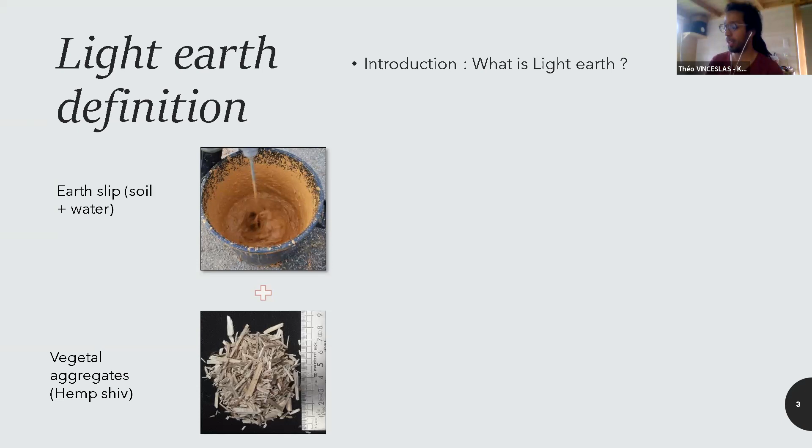What is light earth? How can we make the definition? So it's really simple. We can call it a low technology because it's just earth that is mixed with water to make an earth slip. And besides, we have vegetal aggregates. So here it's an example of hemp shiv, and then we mix it, and we have different kinds of implementation.

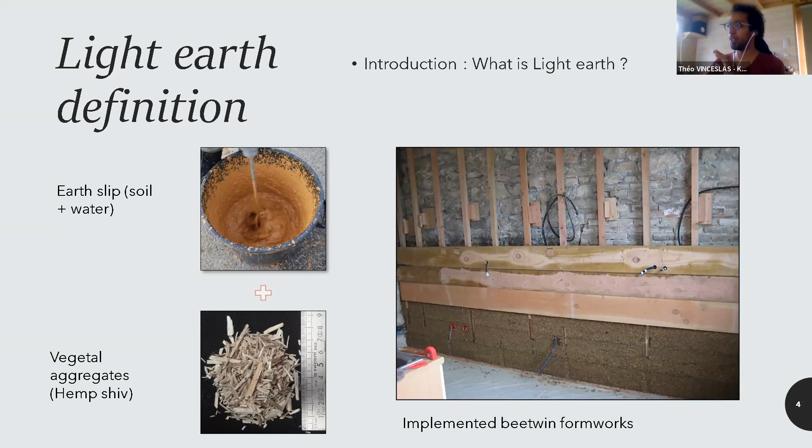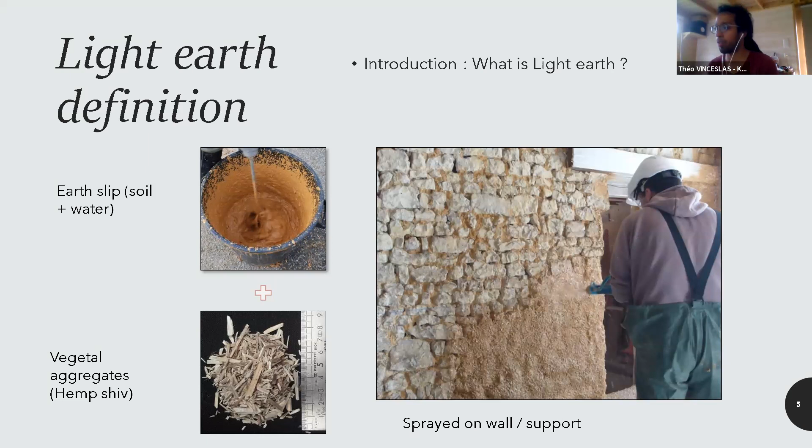So I'm beginning the presentation with simple examples, and then we're gonna go to more specific examples at the end. So firstly here we have an implementation between formworks. It's actually between an existing wall and a wooden formwork. So the mix is poured between the formworks. We can spray it also with a specific machine made for lime hemp or other kinds of sprayed materials. And we can also make some prefabrication, so make some bricks by molding or by spraying.

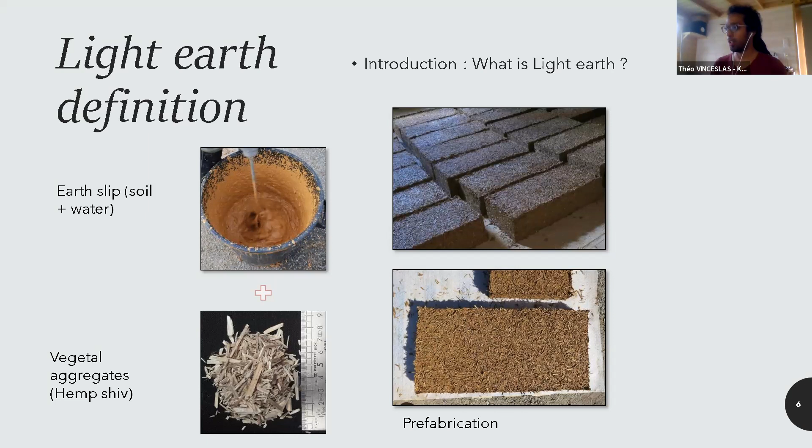So this is really the simple definition, and to go a little deeper, we can look at the densities. Why is it called light earth? Actually, it's because of the volumetric mass or the density that is quite low, to make it an insulating material. So here, what you see are different examples of raw earth with fibers or with vegetal aggregates and their corresponding densities.

So when we take raw earth or soil completely, it's between 1,600 and 1,800 kilograms per cubic meter. And when we add some fibers to it, like maybe you have some examples in Turkey of wattle and daub, we add just some wheat fibers to the earth and lighten it a little.

So it makes something like 1,200 kilograms per meter cube. And then you have the first kind of example of light earth, but applied with a trowel. So it's quite dense, actually. It's still quite heavy, around 900 kilograms per meter cube. And then we begin to really talk about light earth, so between 200 and 500 kilograms per meter cube. So maybe the precise definition of light earth is by its density also.

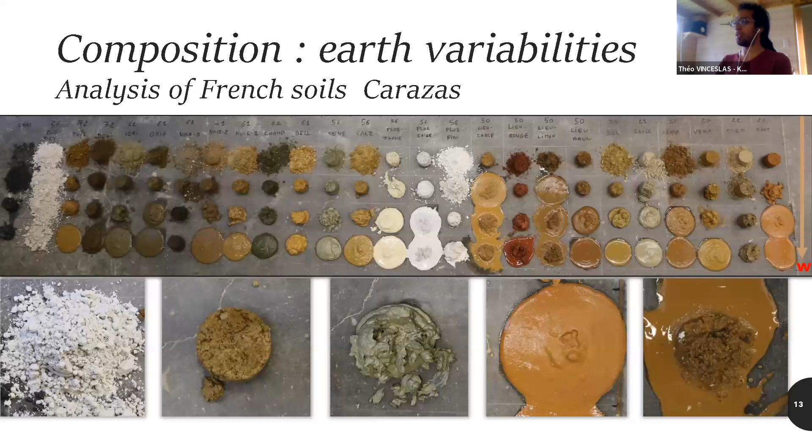So here, I don't know if you see the mouse, but we can say, for example, that this red earth, the earth that is really red, has a lot of clay, and the two that are near have really less clay content and less fine particles. But we cannot say that it's a scientific method. It's really something made to observe the behavior, to learn how to look at the earth, and also on building sites, when you need to choose between different kinds of earth.

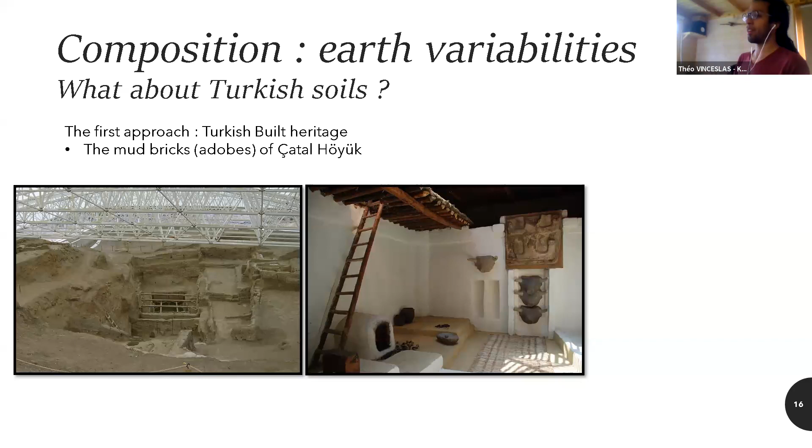So there are a lot of examples like this that show that everywhere you have a way to build with earth. And actually, we're gonna see it, but there's a really big variability of earth, and a big amount of this variability is usable for light earth. With light earth, we don't need a precise earth, and I'm gonna show it to you.

So I found a little scientific article that shows the variability of earth that you can find in Çatalhöyük, and you can see that there's already a big variability, and even with this variability, they have been able to build with mud bricks. So even in ancient times, even with a big variability, we have been able to build.

So now, how can you test if you can build with light earth? This is the first example of a test that you can do. You mix earth with water and try to do this test. It's the hand glove test. The objective is to have the hand in the middle. When you have the hand on the left, you have too much earth in your earth slip, and when you have the hand on the right, you have not enough earth inside your earth slip.

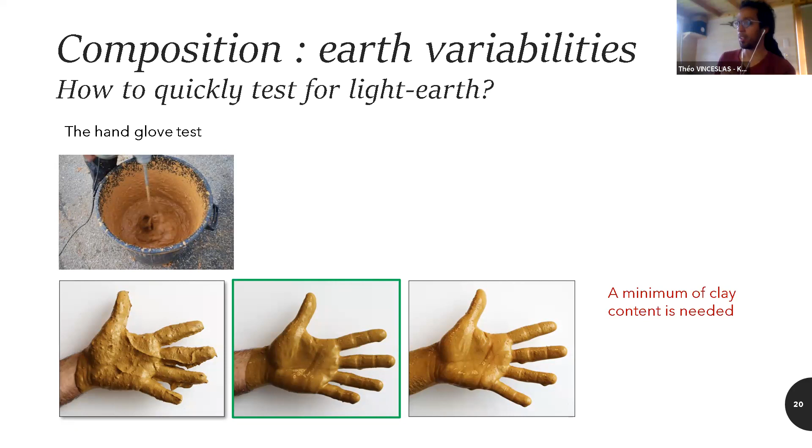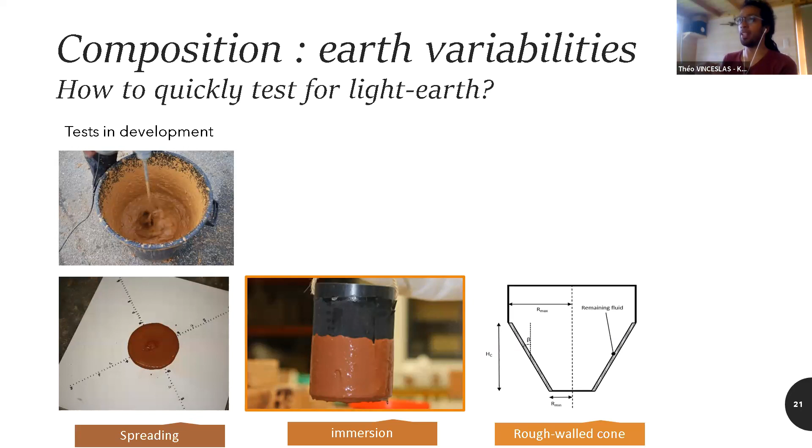So each of these tests is usable on site to characterize the earth slip. But the thing is that we don't have the right way to say that they are equally valuable. We still have to say for each earth what is the measure that has to be reached. So that's why I say they're still tests in development. Okay.

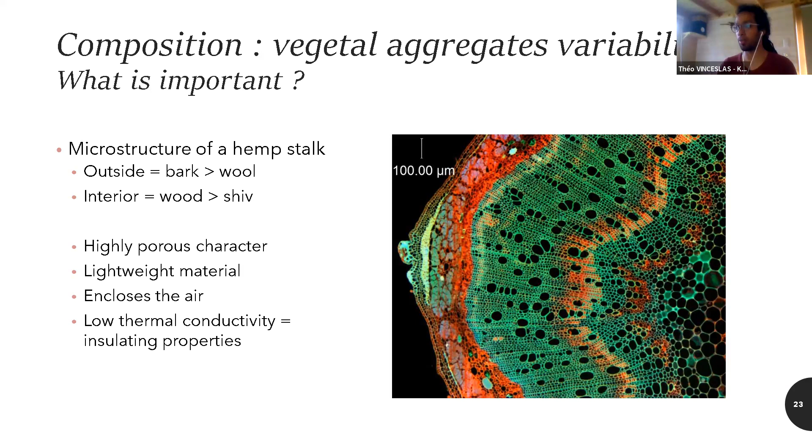And for this material, here is a representation of the microstructure of a hemp stalk. On the outside, in red, you see the wool, the bark, and on the inside the wood that makes the shiv. What we see is that this is highly porous, so it makes a lightweight material. It encloses the air, and what we know is that low thermal conductivity is directly linked with insulating properties, and so with low densities.

So this is to say that the heat conduction property is directly related to density. So this is actually the aim when we do light earth, to try to reach the lowest density possible. And why we use vegetal aggregates for this is because their structure allows us to optimize the density, and because of their structure, we can reach some very low densities of light earth.

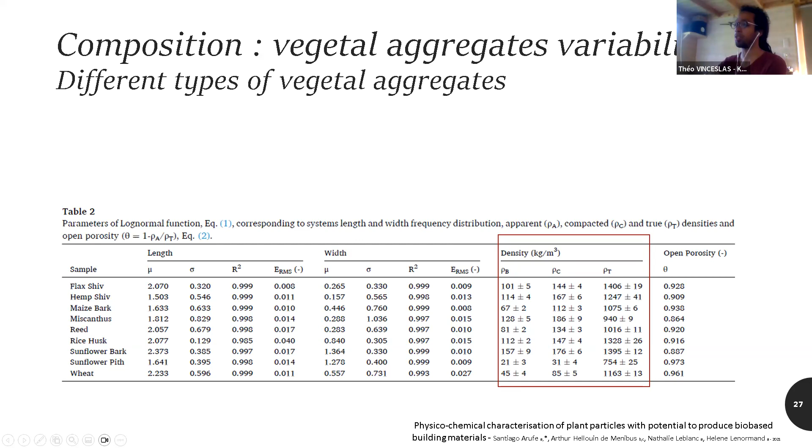We cannot use fibers like the wool of hemp, because it's too hard to mix. It could be mixed manually, but every time you try to mechanize it, it's too hard to mix earth slip and long fibers. So you have to use particles between a few centimeters and a few millimeters.

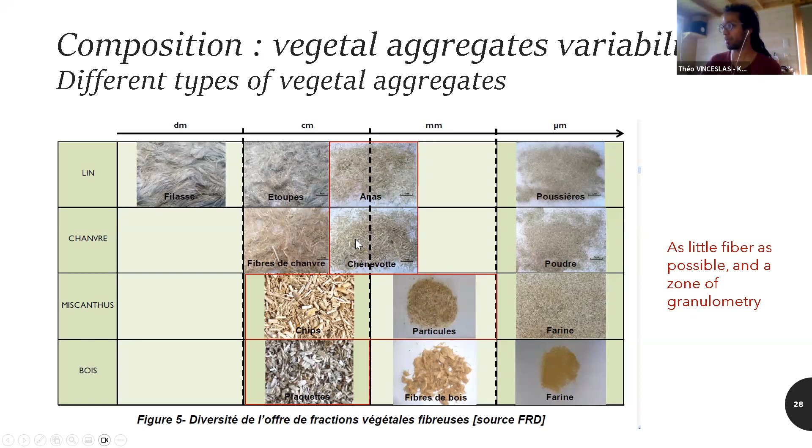After mixing, you sieve it with a 2 millimeter sieve to remove all the big particles and keep just the fine particles that are going to be used for bonding the vegetal particles. Then, once you have your earth slip, you correct the water content.

If you have too much earth, you check with the hand glove test or other tests, and you can add water. Or if you have too much water, you can make another slip and mix them together to find the good glove consistency again. Then you'll be able to mix the slip with hemp, also with a paddle mixer, for example — I'm going to show you at the end how it can be mixed in other ways.

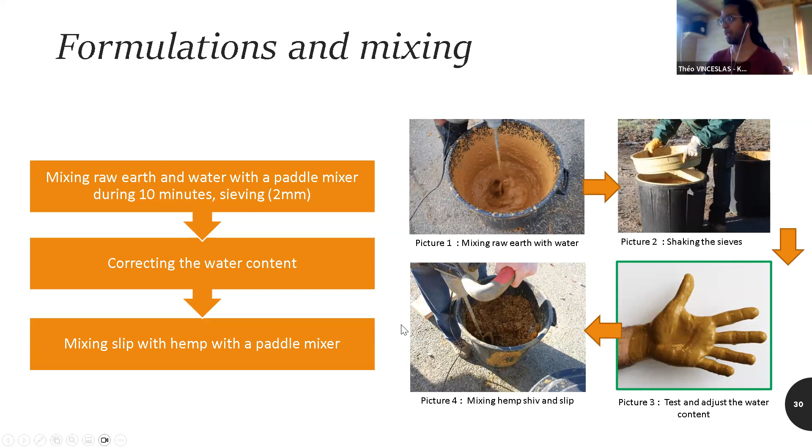As I said, this is a really simple test that is still used in France by craftsmen. The water content can influence the mechanical behavior, thermal conductivity, and density. We saw that the aim is to reach as low a density as possible, while keeping good mechanical behavior. The glove test has proven to be a real good experiment for craftsmen, and we still say it allows us to reach good performances in terms of mechanics and thermal conductivity.

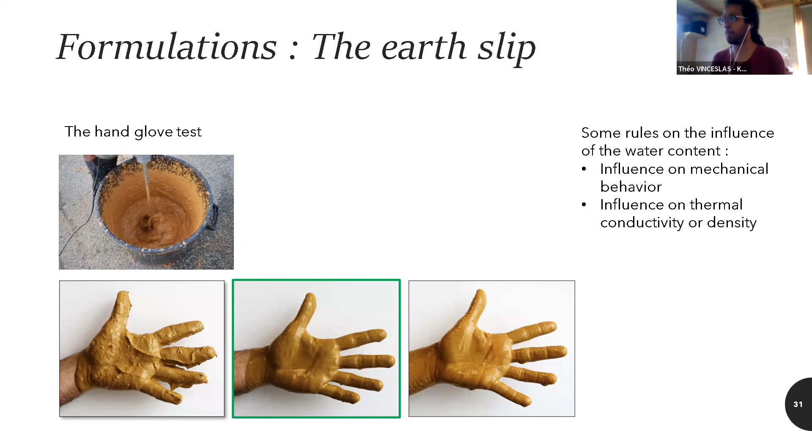This was to show you, in a graphic way, the examples, and after that we're going to see some figures on the performances. The aim is still to reach a really low density.

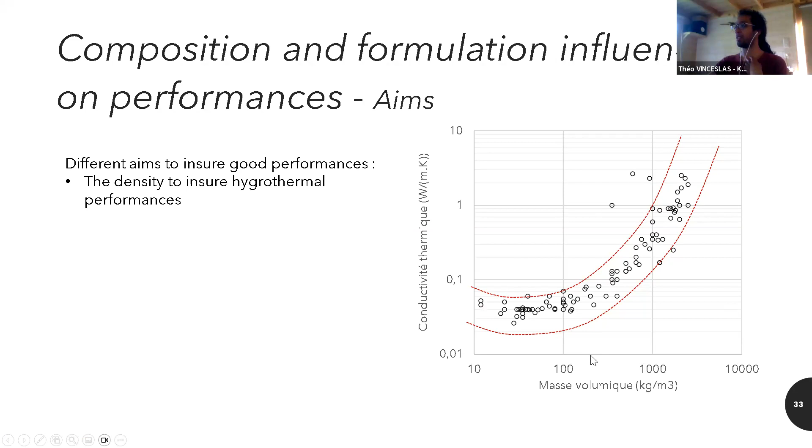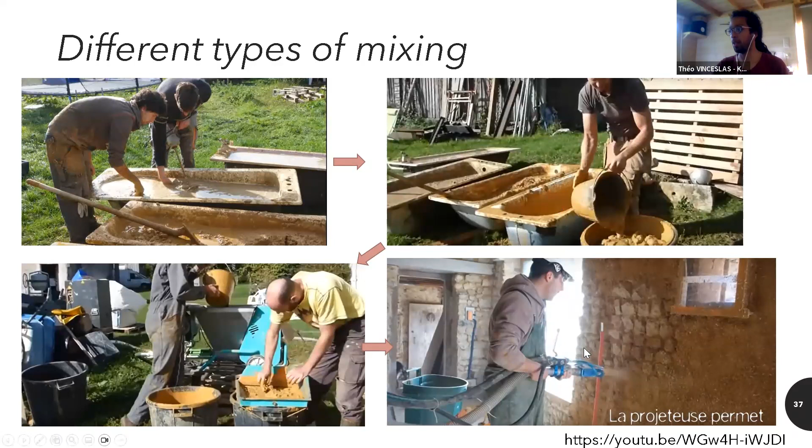The other way to do it is obviously to make it with a concrete mixer. So there is here an example of a concrete mixer. You can also make the light earth mix with it, or you can also make it with a planetary mixer - actually, it's also a quite good way to do it. The planetary mixer works really well.

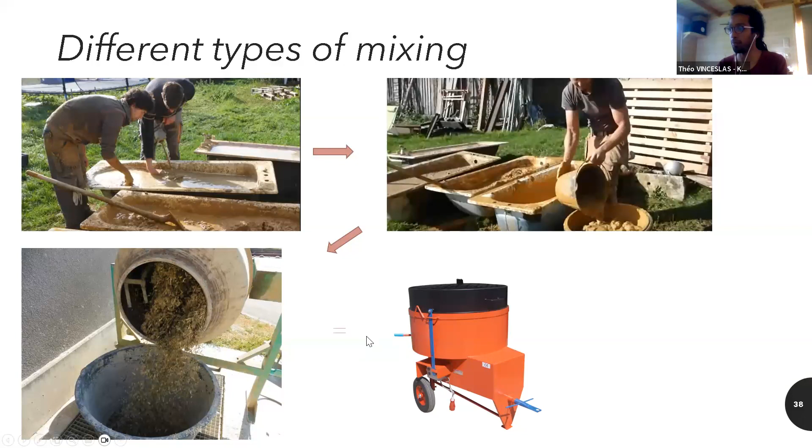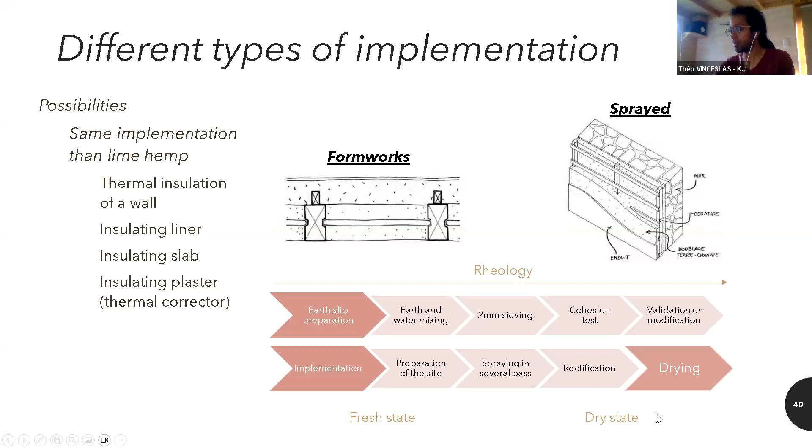I present here some examples of insulation. On the top right, this is thermal insulation by the outside, by spraying. It's actually lime hemp, but we can do the same with earth. You have a formwork on the inside, a wooden structure, and we fill it with earth hemp. On the bottom, you have an example of prefabrication of bricks, and then we do masonry, classic masonry.

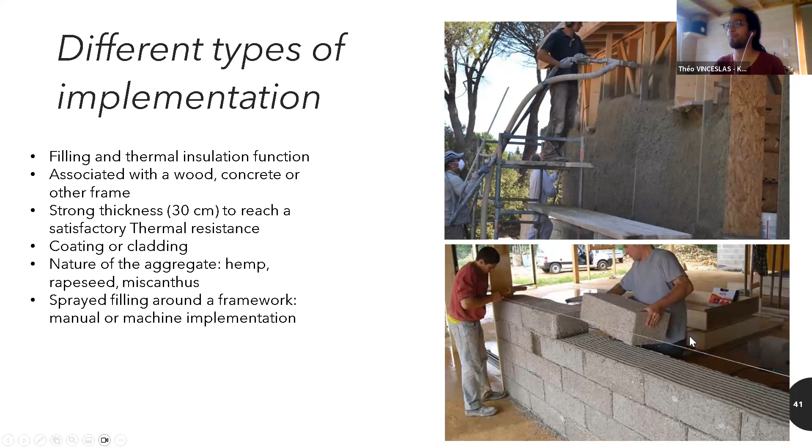So you can also do some renovation. You can double existing walls. You can insulate by the outside with bricks, or from the inside.

This is, for me, kind of the better way to renovate this kind of wall. When you have traditional walls with stones, you have to keep the perspiration - the transportation of humidity from the outside to the inside and from the inside to the outside. When you do earth hemp, you're able to keep capillarity between the inside and outside, and so make a good transportation of humidity through the wall. It's actually a really good way to maintain good hygrothermal comfort without having a big ventilation.

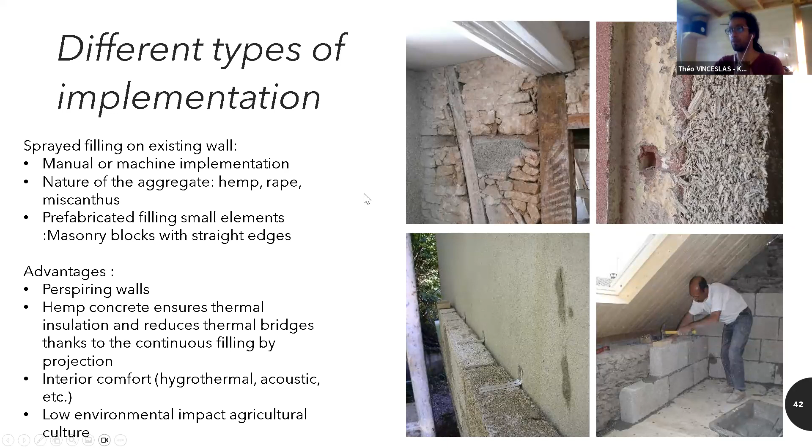As I said, you can also do roof insulations. Here it's an example of a wooden structure filled by the outside. Why it's interesting to do this is because you're gonna have good inertia - an insulating material that is a little heavier than classic mineral wool. For thermal comfort in summer, it's really interesting because the heat has a lot of time to pass through the roof and warm the inside of your house. When you have this kind of material for roof insulation, it's really nice for a hot climate.

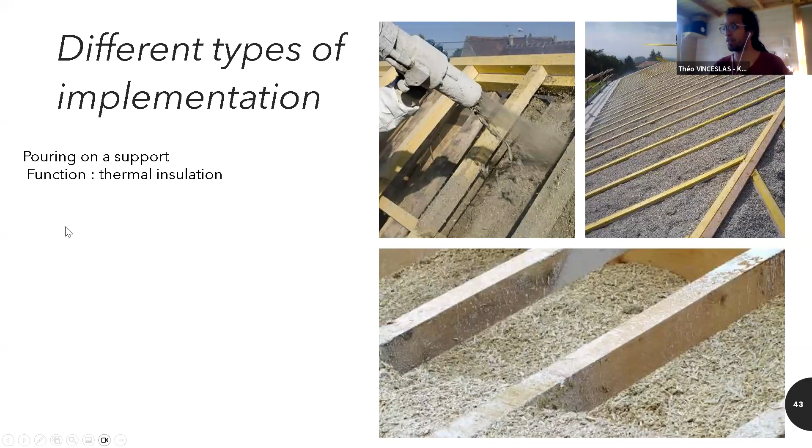This is also a different kind of spraying.

For the end of the presentation, I'm going to show you some examples. Here is a quite recent example of spraying in a wooden structure by the inside, in Normandy, France. We have a full wooden structure that has been filled from the inside, on the walls and on the slabs.

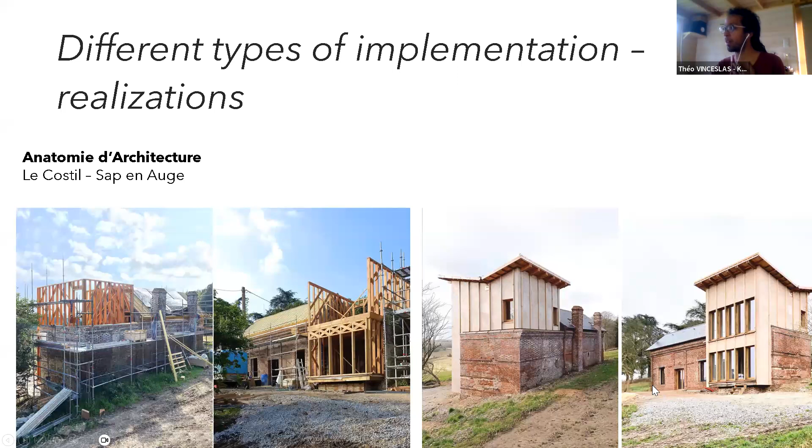This is the dry state. This is the construction process - you have the wooden structure that has been made. This is a renovation, and then the earth hemp has been rendered with lime on the outside.

This is during the construction process on the inside, the filling to help the spraying process. You can add a frame that we see on the wooden structure. It's gonna be useful so you don't have to do rectification, to have a homogeneous surface. It's actually easier to spray through the frame that we see here.

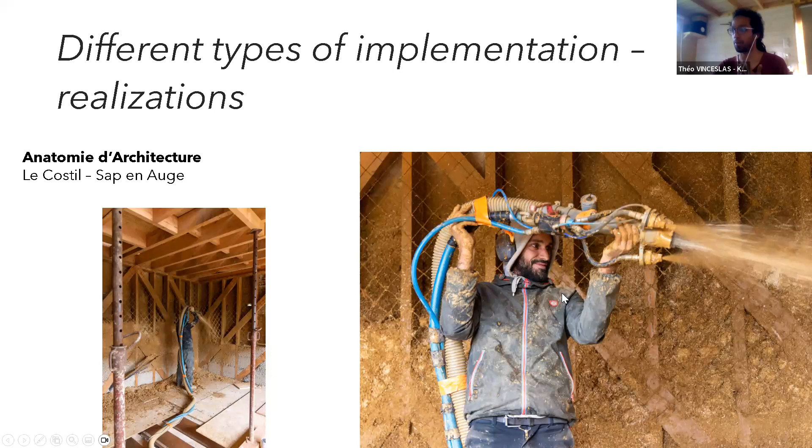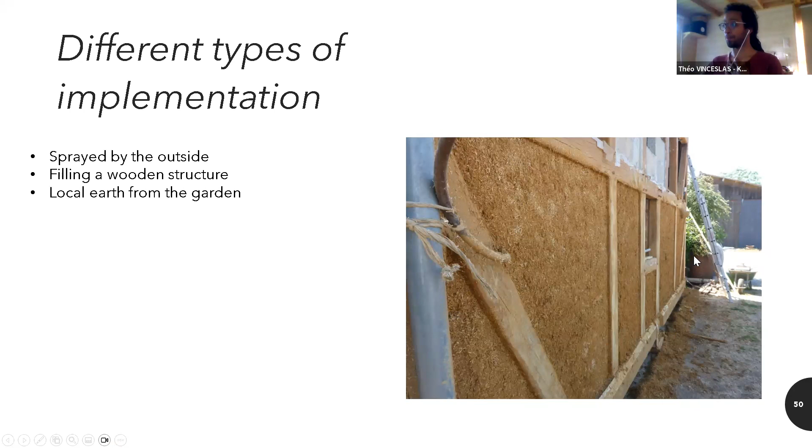This is an example of filling a wooden structure from the outside. It's also a renovation, and we've been doing thermal insulation from the outside with earth from the garden actually. This is also the making of an example.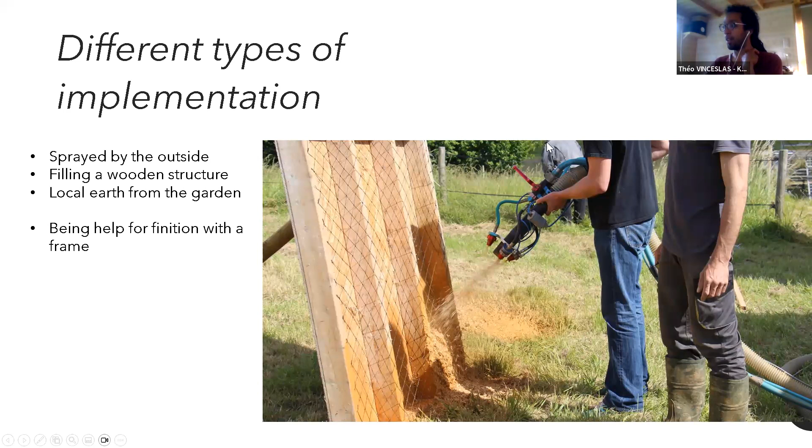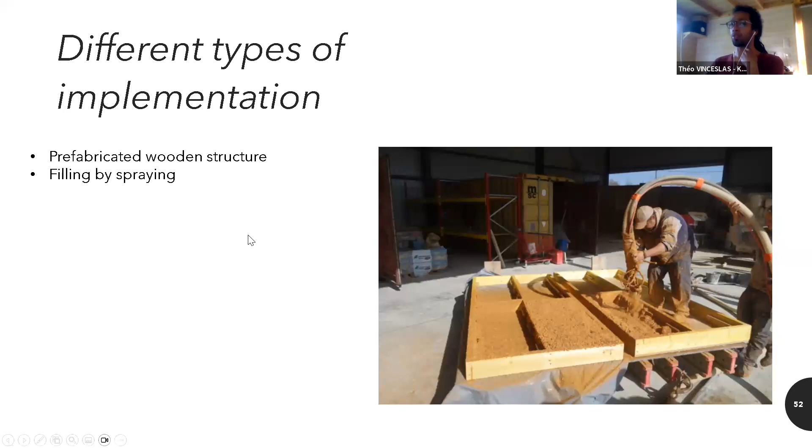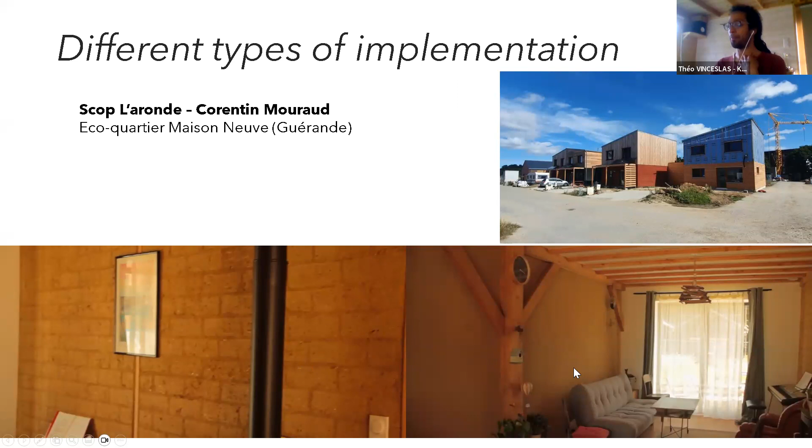So yeah, to end the presentation, I wanted to maybe just discuss some advantages to put light earth in seismic zones. So we have actually ongoing studies in the research program that is called PNTerre, for Projet National Terre. So it means national project on earth construction. You can actually find it on the internet, and there are a lot of studies ongoing on different kinds of earth building styles.

But there is one study on light earth, and we try to look at the behavior in seismic zones. What we actually have as a hypothesis already is that we have a high deformation capacity. So it's interesting because it's not gonna break easily. We actually have a gradual crumbling, and it does not break in a fragile way like concrete. So you're not gonna have big amounts of light earth that can go down. And it's actually also a material that can participate in the bracing of the structure.

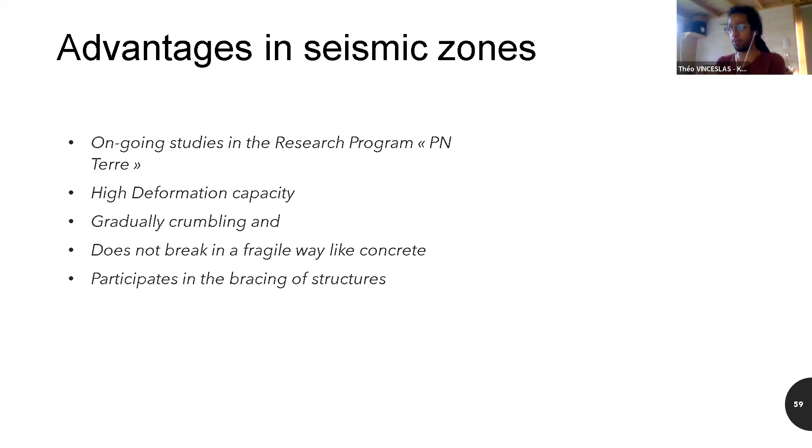Okay, so I put just some personal work and bibliography, but I can send some references to Matthieu and he'll be able to reach you. So thank you for your attention, and I hope we have some time to have a discussion.

Okay, thanks a lot, Theo, for this presentation. Very technical, but at least for me, very interesting because of all this technique behind and all the information that is necessary to be able to use those materials properly. So thanks a lot for it.

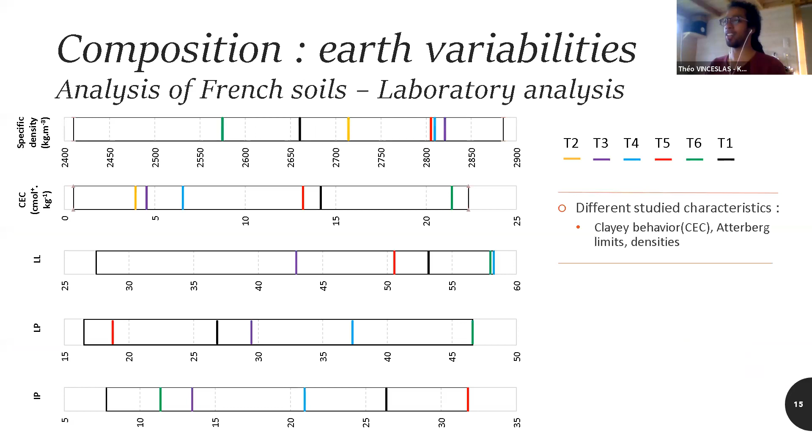So it was actually only for light earth, but we had a process to collect this earth because we wanted to reach the extreme parts of the variability that we can have. So we asked all the craftsmen that we know to give us some earth that they used. And it was used for different kinds of things. Most of the time, actually, it was used for plaster. Sometimes it was used for wattle and daub. Sometimes it was used for cob. But most of the time, it was render also.

But for them, these were earths that were quite hard to use because they had some extreme behavior. Could be because they had a lot of clay or not enough, so we wanted to have this extreme behavior to be able to reach a large variability. But yeah, it was just for light earth. Okay. Thank you.

Thanks a lot for this answer. And yes, I also had a question about this type of earth. So after testing all these different variabilities, these different types of earth, at the end, can we really use any type of earth if there is a minimum of clay?

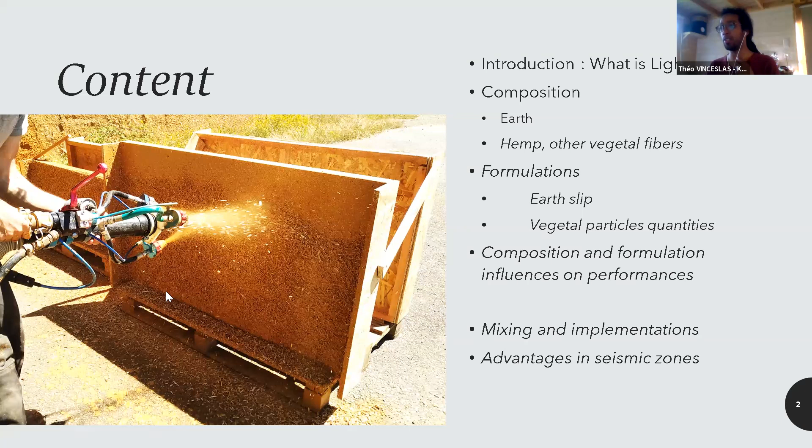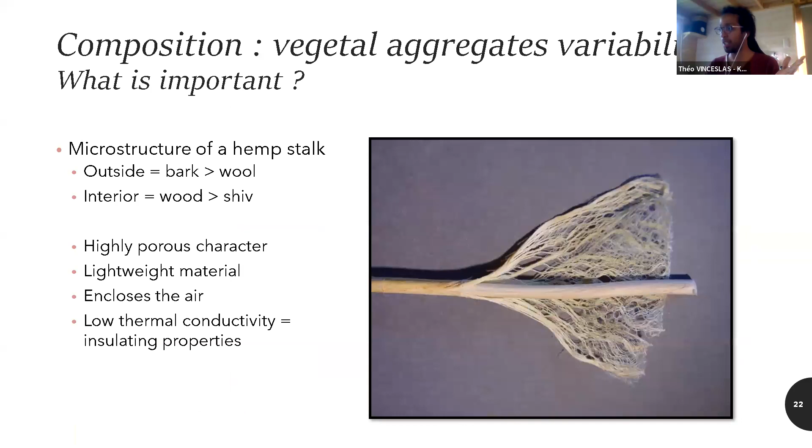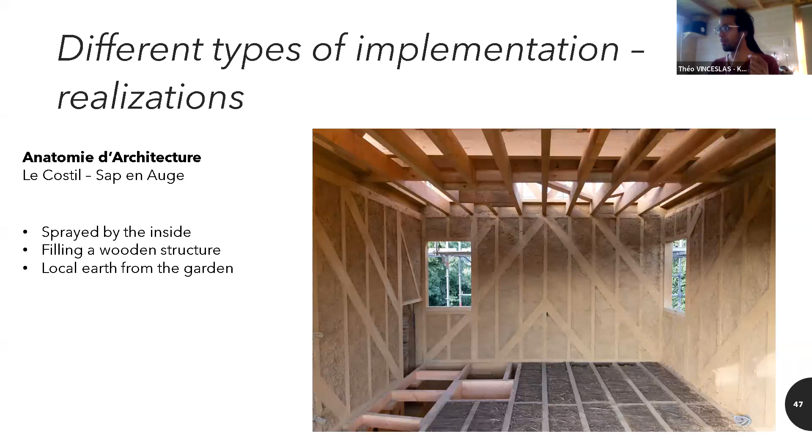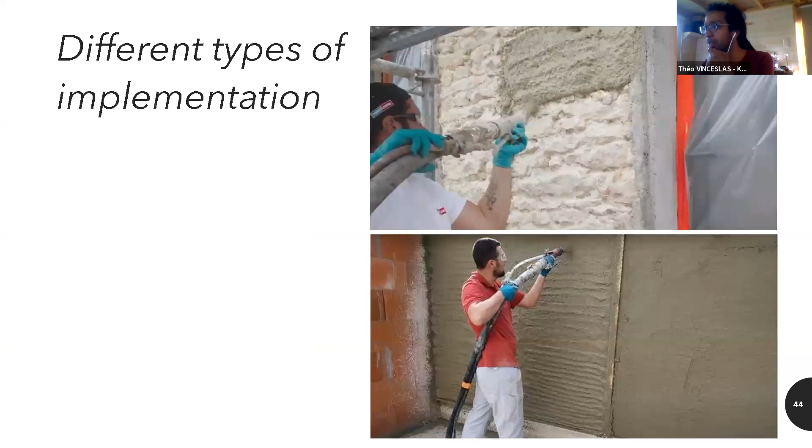There was a question in the chat about the resistance of this material to fire. Yeah, I thought about it while doing the presentation, and finally I forgot. I'm sorry, I didn't have the results in English. I had some articles in French, but we have some results on fire resistance, and there's also an ongoing study in the National Program of Research on Earth Material. What we see is that for most of the formulations used to insulate buildings, we have a really important fire resistance. Sorry, I'm just going through the presentation to find some results.

Here. Okay. So what I found is that when you are above 250 kilograms per cubic meter, you have really no problem with fire resistance. We reach the highest class of material for French regulations, and it's really not crumbling at all when you are above 400. But above 400, it's not interesting as an insulating material. So with French regulation, when you are above 250 kilograms per cubic meter, you reach the good condition, and you are fire resistant.

Why? Because you always have earth around your vegetal particles, so you have a really low amount of vegetal particles that can take fire. And this is just for the material, without protecting it with any plaster. When you add plaster, then no problem. Okay, thanks a lot. This was a very interesting question, because there is always a risk of fire in such kinds of buildings.

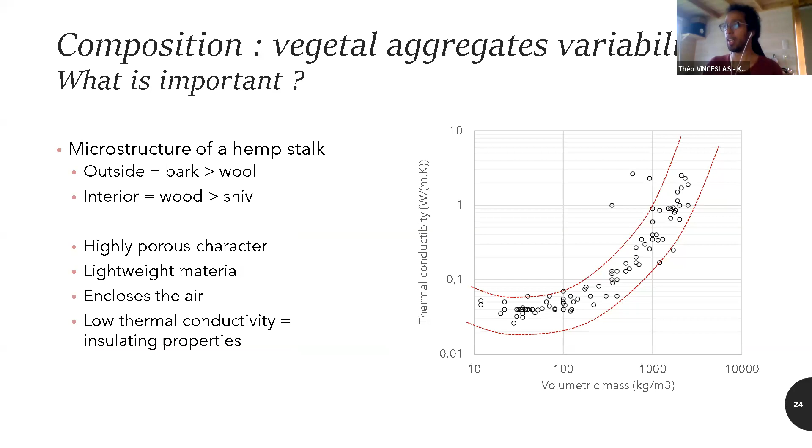And on the type of earth, it's the same thing that I said before. You have to have a minimum amount of clay. What I saw is that actually all the mixes that I was able to make that didn't crumble down during the making process were able to receive a plaster. When I had the kind of earth that was too sandy, the sample was already crumbling down, so you cannot do anything with it. So you have to have the good amount of fine particles, and then you can do plaster with it.

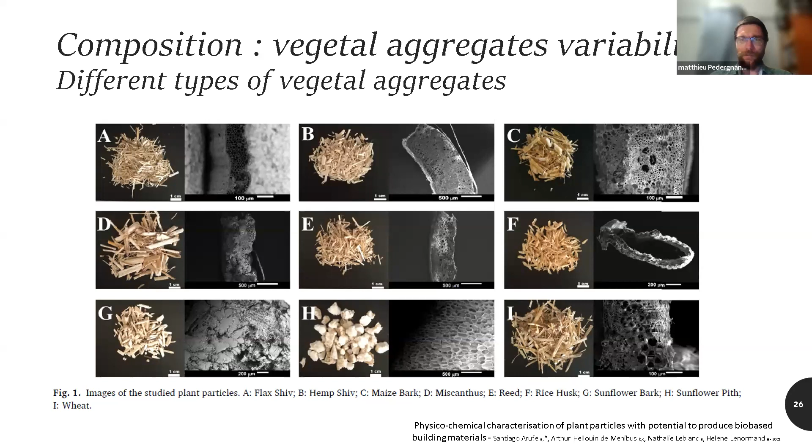And another question still about these mixes. What would be the maximum thickness of wall you recommend to be able to dry? Because we are working on walls sometimes that are 30-35 centimeters thick, but of course we don't know. We don't open them because it's directly on the building. Because of the climate, we are pretty sure it's drying. But do you have any maximum size? What do you think about it?

I don't actually, I'm sorry. I have some examples. I have some connections with people that are really building. It's their work, but what I saw is that the maximum that was done was 35-40 centimeters, but it was always done during the summer or just before, never in winter, and not even September, October. It was too late already, because during the winter it's not drying, and then it's not good for the material.

I have an example that's good to share. I saw building sites in the countryside where they were spraying on the wall from the inside. And it was done late in the summer, end of August, beginning of September, and two weeks after, we had massive mushrooms growing on the wall.

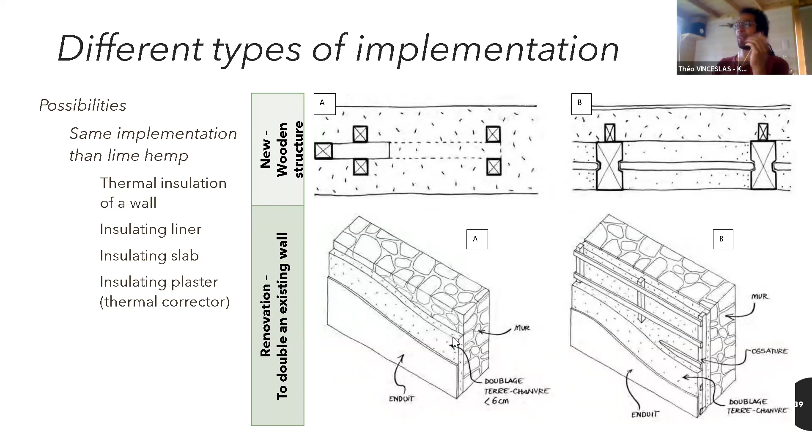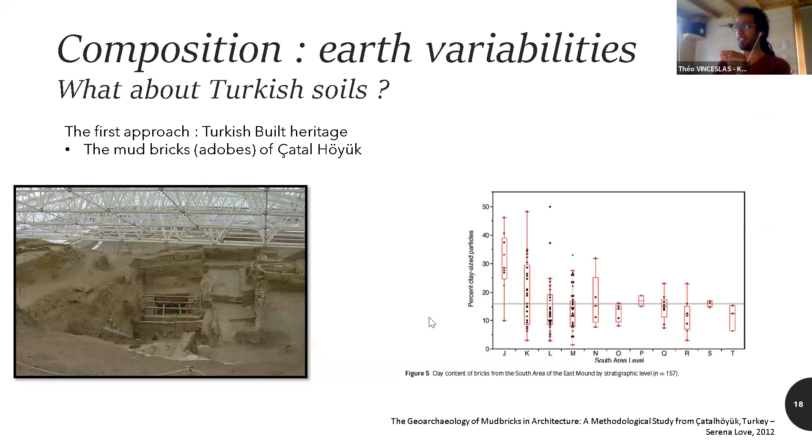So for these kinds of questions, I always say don't use it for that kind of reason, but it still depends on the situation here. I mean, it just depends on the situation, because sometimes it's useful to do it, even a little thickness, if you're in cold regions, cold climates, and you have stone walls. Why? Because the stone walls are quite cold to the sensation when you're around them, and

the fact that you put an earth hemp render makes a surface that is warm to the sensation. So even if you put 2, 3, 4 centimeters on the stone wall, then they will be able to heat their interior less and maybe consume less energy because they have less cold sensation

on the inside. So sometimes in France, when we have a renovation and people don't want a big thickness, like 20 or 30 centimeters, we do 6, 7, and we apply it with a trowel like this, and it cuts the cold sensation of the wall. So you reach a warm surface, and that's a very valuable argument.

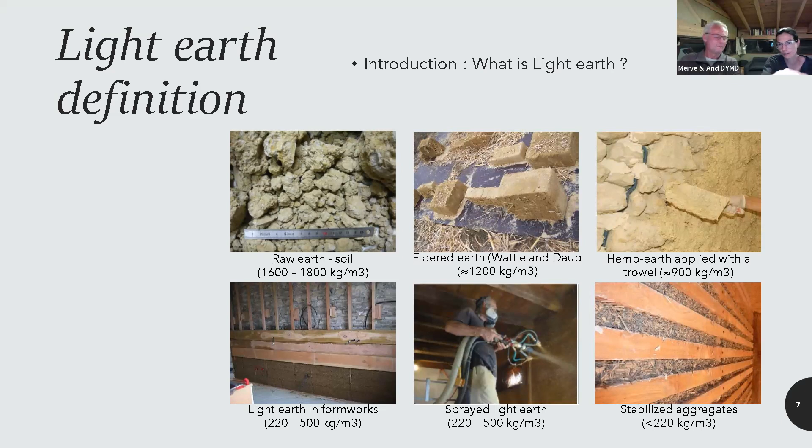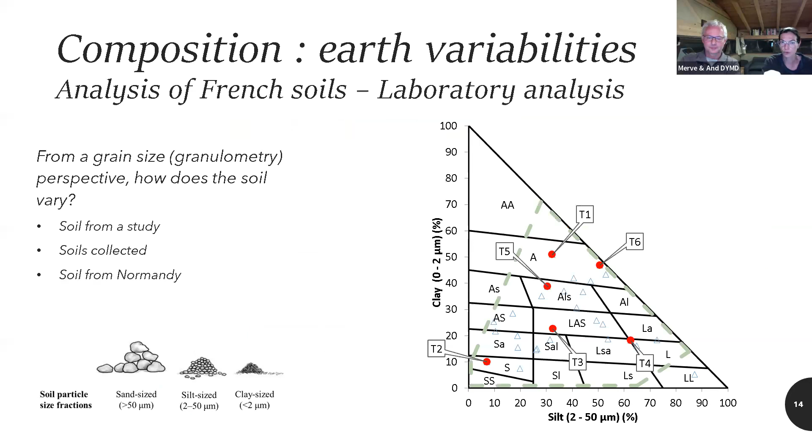But in your tests, when you reach the density and the performance, for example on your curve, which thickness did you use for your tests in light earth? So you show the density and the insulation performance, for example. I think you always used one wall thickness.

So for the quantification of the conductivity, it's normalized. What we do in the laboratory, what I did, is 10 centimeters. But the result is usable for any kind of thickness. But for 10 centimeters, with the highest fiber concentration, you can reach very good performance.

Yeah. Here I speak in thermal conductivity, but you can also use the thermal resistance. I don't know if you know it, but it's the thickness divided by the thermal conductivity, and then it really gives you the thermal resistance in terms of the thickness of your wall. But here I give the results for any thickness.

Right. So the thermal conductivity is not dependent on the thickness. That's why it is done with 10 centimeter thick samples, but the result here does not depend on the thickness. So it could be done with 5 centimeter thick samples or 25. It would be the same results. Mm-hmm. Thank you.

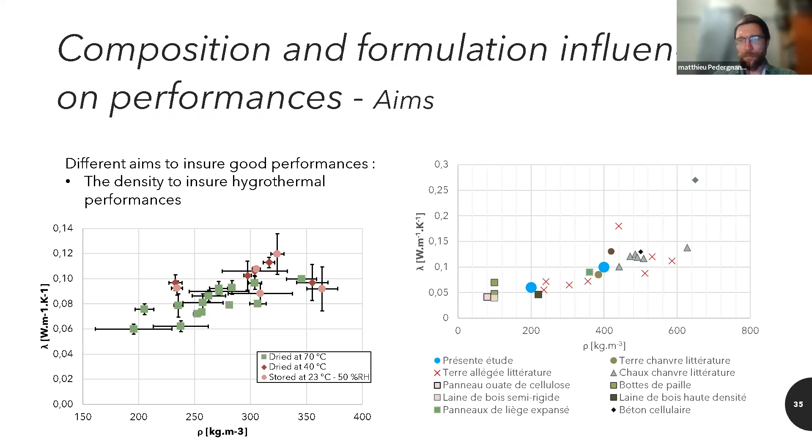Okay. I don't know if there are other questions. I would have hundreds of questions, but time is passing, and I don't think we can. We should keep Theo longer, but

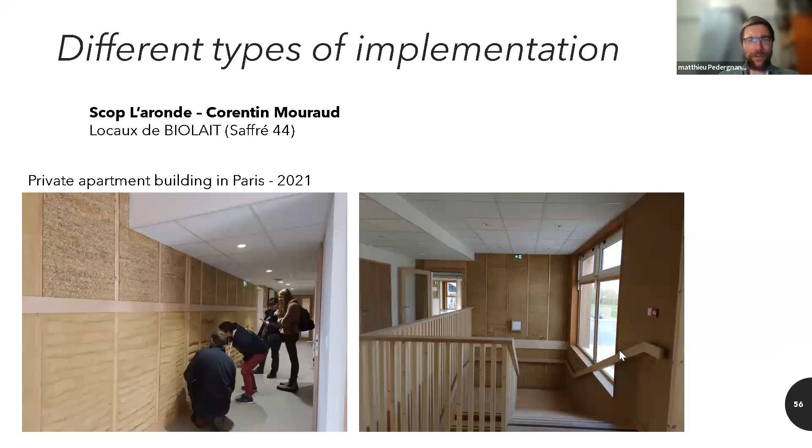Theo, before leaving, could you show this large building with a lot of prepared panels again? Because it seems very interesting to me to see that it is possible to build a very large building with this kind of technique. So thanks a lot for sharing it. I didn't know such large buildings were done already. So I'm really happy to see that it is possible.

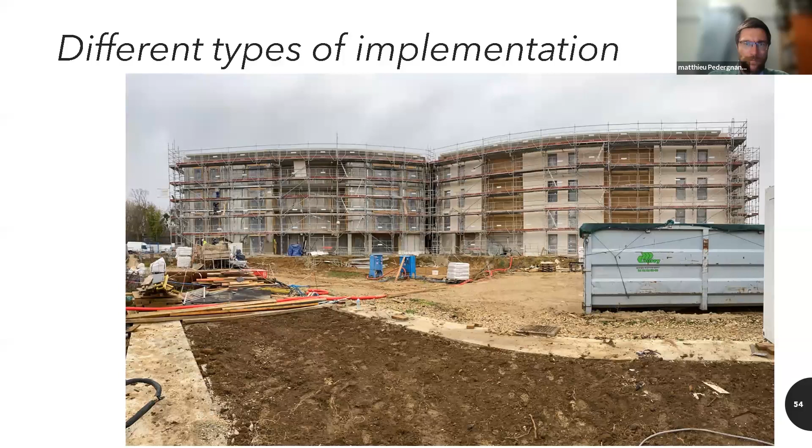Yeah, sure. So maybe just an anecdote on this one. It is very interesting, but it's a little bit specific, because ACTA, the company doing this, uses earth in bags. They buy earth that is already prepared. They don't make the earth slip themselves. So they have something that is already characterized and easier to maintain over time. They don't have variability during their building. But still, it's impressive.